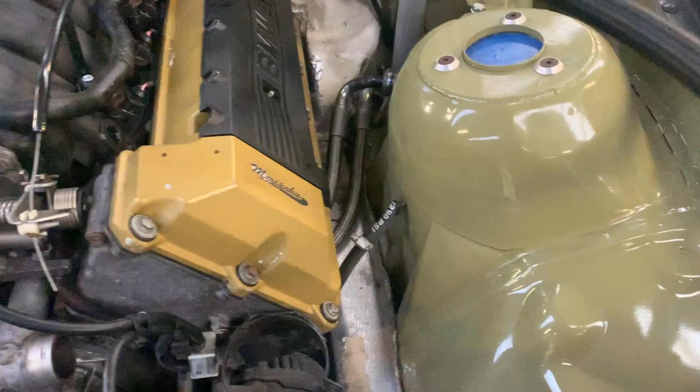We'll probably make a new one for that and go in that direction. And same over here, we're going to be going from here. We'll probably make some kind of fill point over here. And where we're going to be ending up with those lines is right over here, which is where I've cut a couple of holes. Right here, we've pulled the oil filter canister.

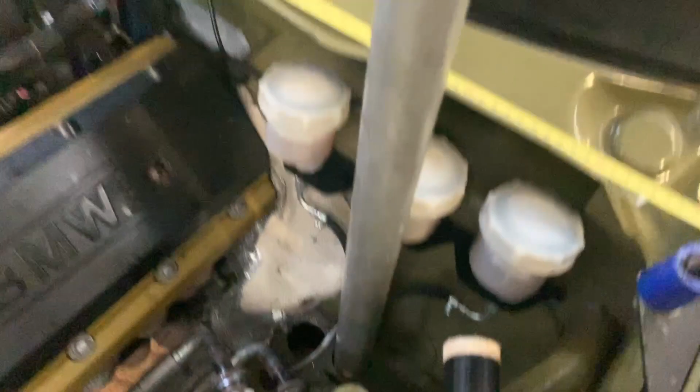I've just stuck this tube in here. We've drilled through over here, and we're going to be ending up under the car right over there, and you don't have to worry about the wheel because the wheel is never going to be touching it. Over there we made some space, but we're going to be bracing that, of course, right over there.

Like there, under here is where we'll make a brace. We'll box this whole section up, of course, but there's going to be a little brace under there just to be sure if you hit something or whatever, just to add a little structure.

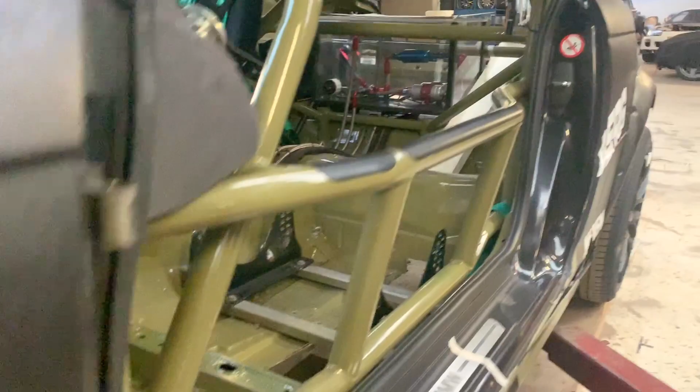On the inside, we had to have the scary job of cutting. As you can see, it's not very easy because it has the FIA style seat mounts. And over here, that's basically where our tube is going to be coming out, right over there.

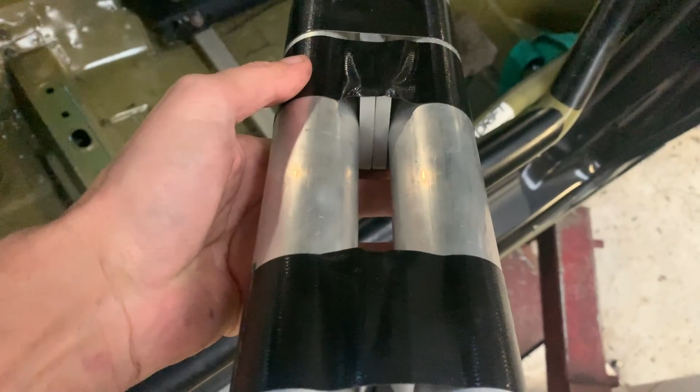So what I always do with these types of deals is get two tubes and space them the way we want to. We just have these little blocks that we use to space everything out for that. And that's what we're going to be working with.

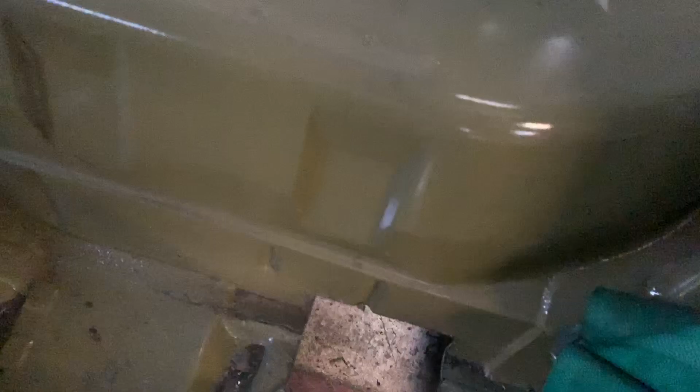So these things basically need to go under the car. As you can see, that's basically where they're going to be going. We need to make a solution for the seat frame because it's going to hit over there. Good thing that the driver of this car is not very tall, so we can go up a little bit with that.

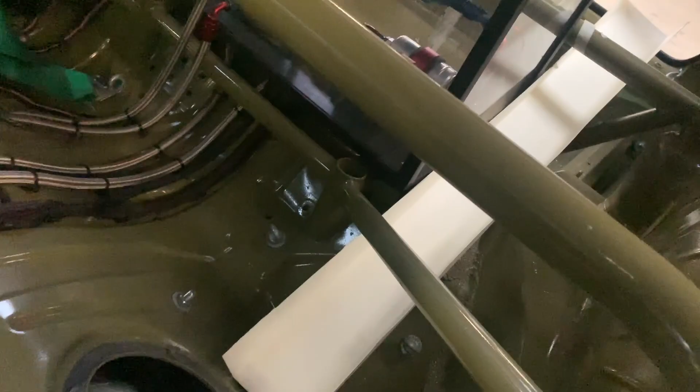And we're going to be coming out of the floor somewhere right over there. And I've made a little cardboard box over there to mock up how we're going to go to the rear. Over here, there's already a little bit of space from the factory, so to speak, in this section. That's where one could basically go over here already all the way to the front, but the second one's never going to fit.

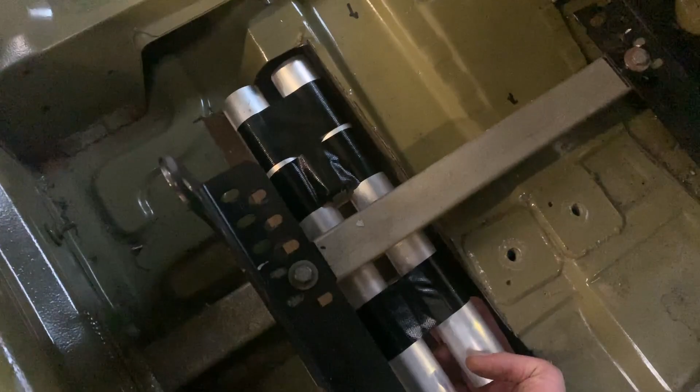So we're going to be boxing this section. We're going to keep the seat frame in there, of course, and box that all the way to the front so these tubes can run through the floor. It's always a little bit of a scary sight.

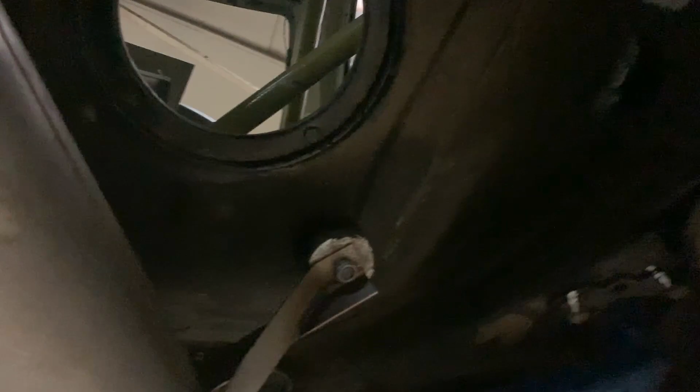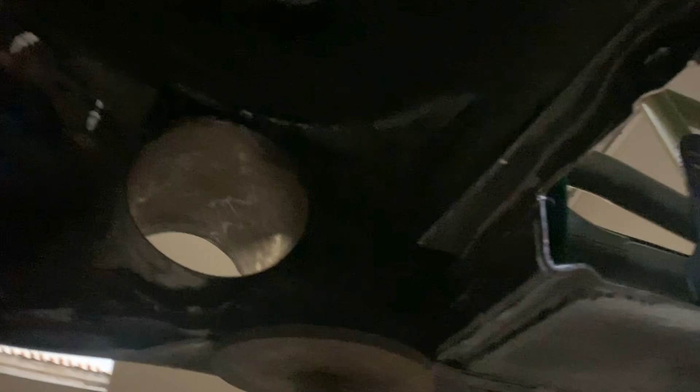Here we've cut out on the floor, and that's where the tubing is going to be coming out of. And that's where you can see the exhaust is over there, so we're probably going to be looking to get tubing right over there, go in there and mount the electrical water pump up there. Yes, it's going to be a nice cavity, so it's not going to be the lowest point of the car, and we need to be extending right over here.

We're probably going to be bracing from here to there to get some strength, and that's where the tubing enters the car. So yeah, not the easiest solution, but it's basically the only option that we have.

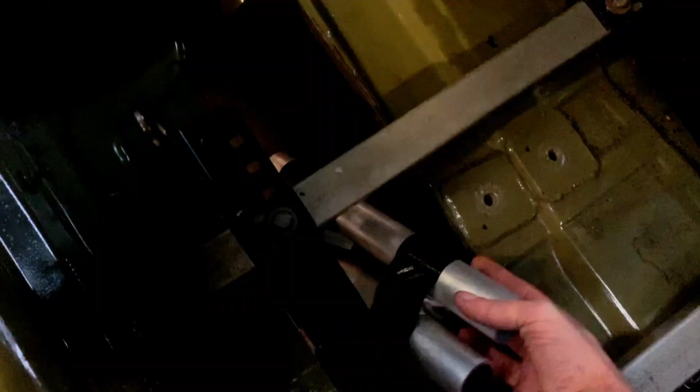There's a lot of people that run stuff through the interior of cars. I'm not really crazy about that. And people say, yeah, but you can box it up.

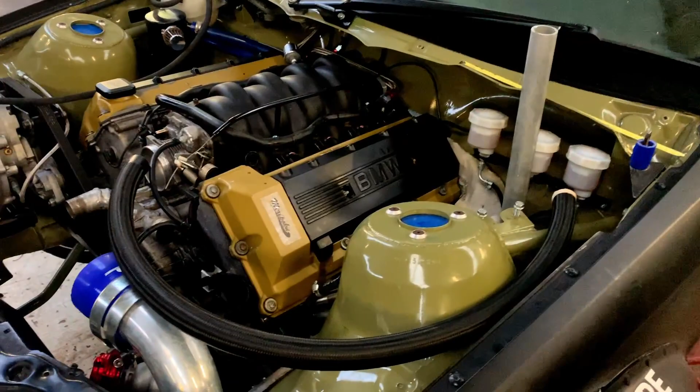It's the same as a floor loop in between, but the difference is that it won't lose any heat in the process. And if you run them under the floor, it will basically operate as a cooler as well, so the tubes will be able to get rid of their heat and it will make a huge difference.

It's a radiator that came with the car that we're going to be using. It's an HGK radiator, it's a C&R, but HGK modified it. I think over here they ran an oil cooler at one point, it's blocked off right now. We're not going to be using that, but this is a client-provided part.

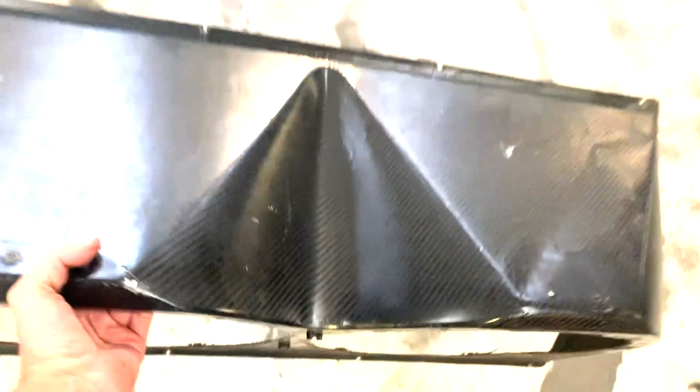And it also has this really nice Kevlar carbon fiber shroud that's going to go on there, and we're going to be using all that and vent out of the trunk. It's kind of a nice piece, really cool.

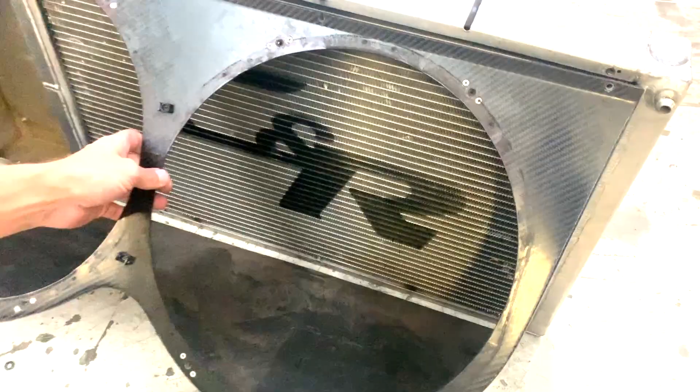And here we need to block up the trunk. Guys that have seen the way I do that on the E36, same way. So we make this whole template, which is going to go basically over there, and we're going to be boxing off that whole section. Can't do it right now because that little cardboard section's over there, and we're going to be using our famous piece that I always use on the E36 to close this off and make like a shorter parcel shelf situation.

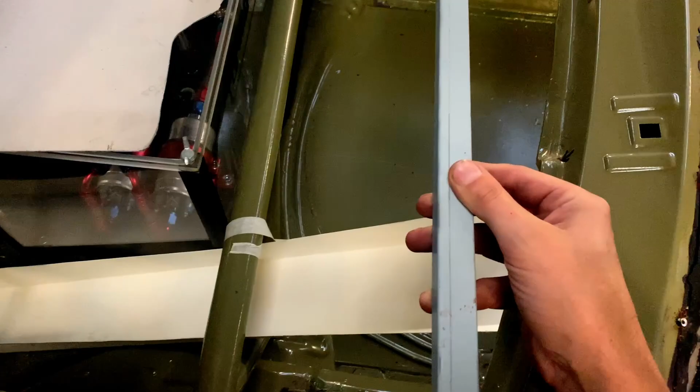As you can see, that's basically where the firewall is going to be. We're going to be coming through with that piece over there. So a lot of fabrication going on, of course, with these deals.

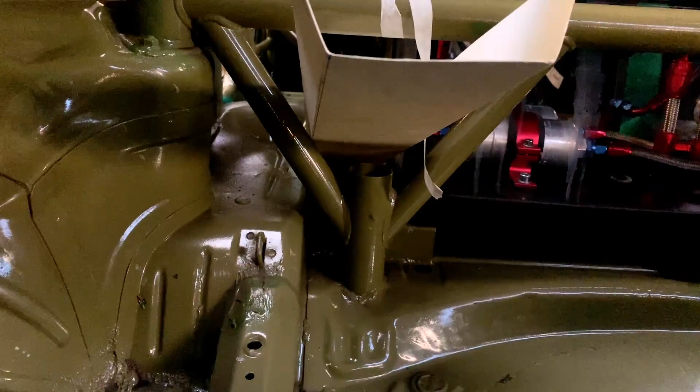It's very, very difficult here because you can see that I need to work within the confines of the roll cage reinforcement for the rear axle, and right over there is another tube. And there's this huge box for the fuel system, so I need to work around all of that.

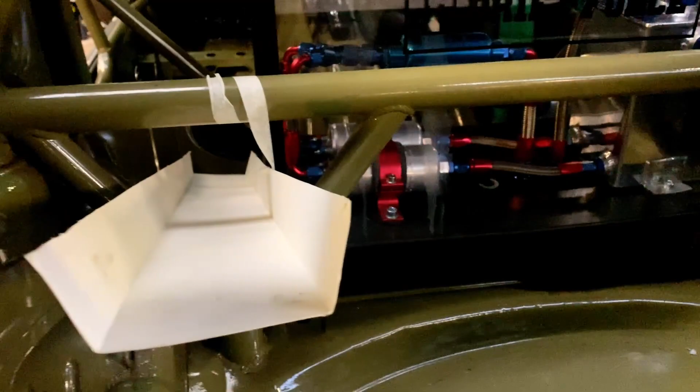There's basically only one window of opportunity to come through here, and the exhaust is right over there, so it's very, very tight. Like I said, one of the most difficult cars I've ever done this conversion on.

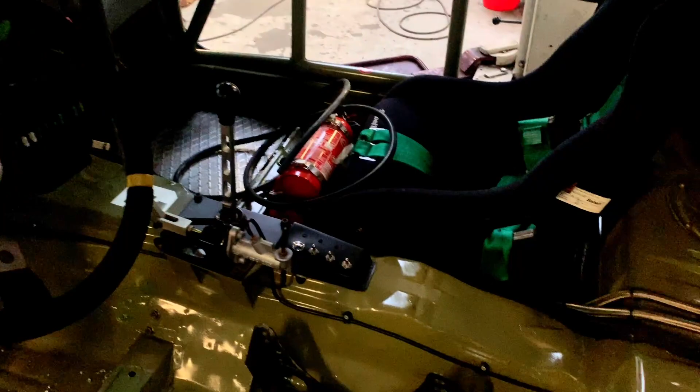Yeah, so that's basically the only option. You might say, hey, let's route it on the passenger side, but the original style tank is still under here, which completely obscures the floor, so there's no way I can pass under that.

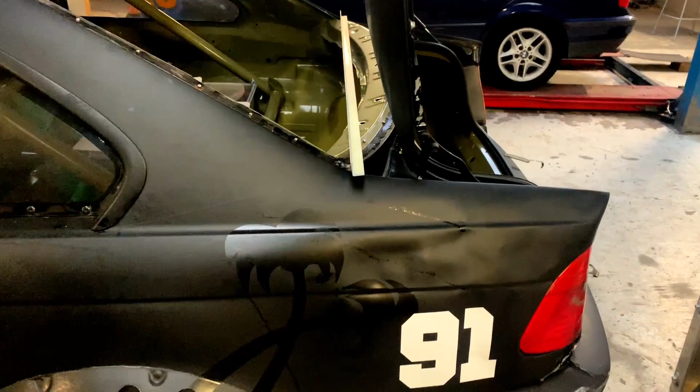And with these types of deals, you need to go from the floor and go over the rear axle somewhere, because the radiator is going to be behind the rear axle. Like on my sedan car, obviously the radiator sits in front of the axle, which is a lot easier with all the tubing.

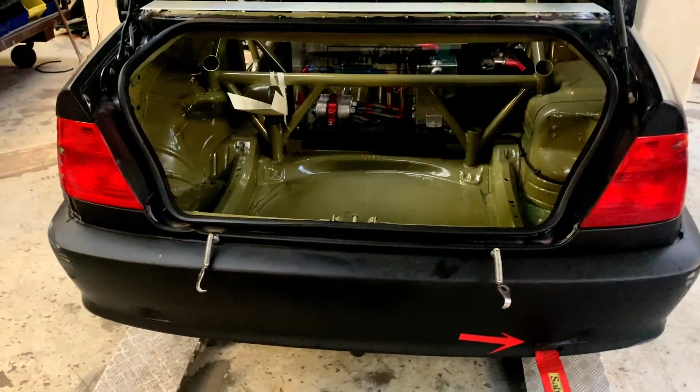Because with any car, it doesn't matter if it's an E46 or an S-chassis or E90 or whatever, it's very difficult to pass through the rear axle with all these lines, especially if it's a V8, because you're going to have a little more elaborate exhaust than a turbo car, which may have just one exhaust. So that's just a little bit more difficult to do.

It's always a little bit of a puzzle. And like I said, you're really going to have a lot of trouble moving those two coolant lines across the rear axle. So before the rear axle starts, before this point, you really want to be inside the cabin with the lines. Otherwise, there's no way you're going to be making that work.

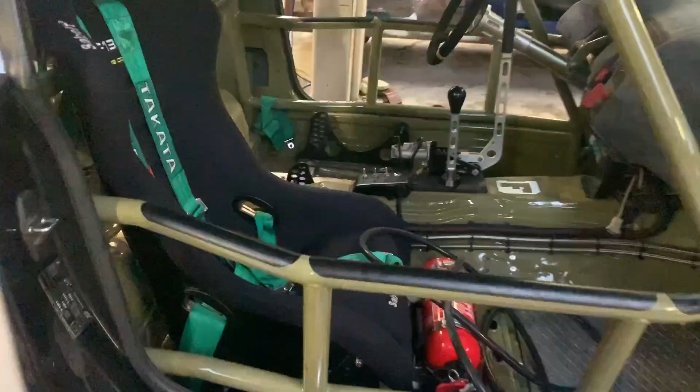Yeah, there's another little view. It just sucks that the floors aren't really straight on these cars. There's all kinds of little things in there. We have to basically make it straight, which is not the easiest job to cut.

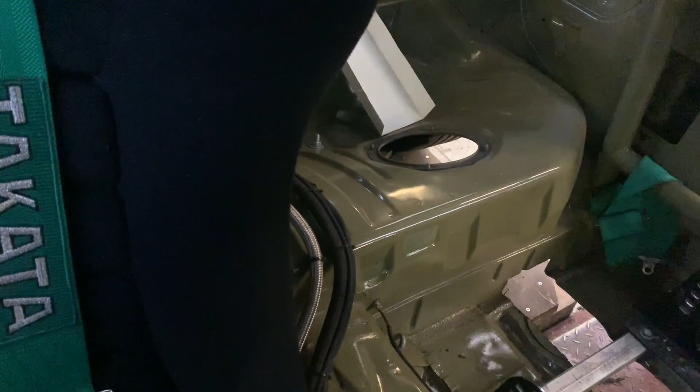And there, you can see it's really tempting to use that manhole over there. On the other hand, it's also going to be a little bit difficult because it's a little round piece, and I kind of want it to be detachable because I want to put the electrical water pump in there, so we could access the electrical water pump through that gate.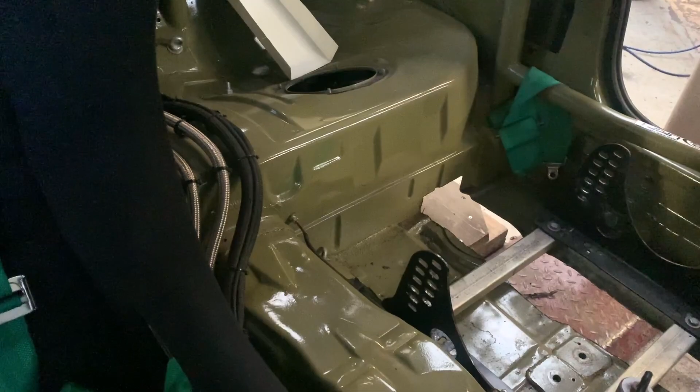You can see it doesn't completely line up, so there's going to be a little S-bend that has to be made in the lines. But like I said, the electrical water pump is going to be underneath that manhole, so we're going to do a little bit of fab work over there just to connect the return and the feed line for the radiator to the electrical pump. So the electrical pump is going to be in the return, and the feed line is obviously going to go to the radiator.

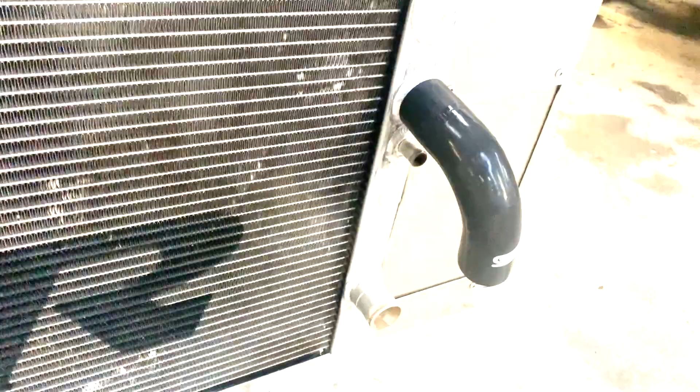One really nice thing is that this radiator is dual pass, so it forces the fluid to go through the radiator twice, which is nice because it means the lines are both on the same side. Otherwise you'd have to come across from here to here. On most cars there's one pass, so the hot side is over here and the cold side is over there. They've done a lot of changing on this radiator, but HGK runs these in a lot of cars, so we're just going to roll with that.

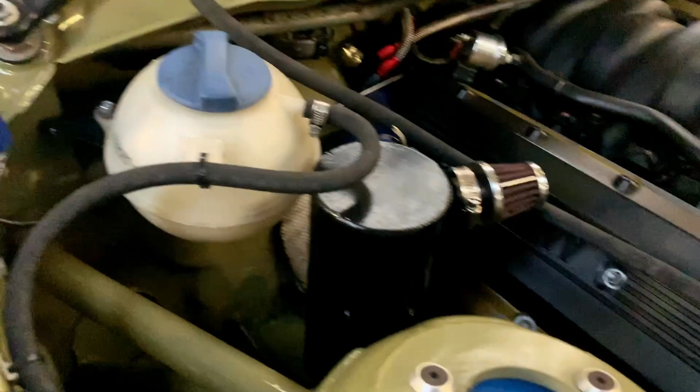There's just going to be a little vent port over here, and this is where the radiator gets filled. We're running another fill canister over there, a cheap solution for the fill canister. These VW ones, I'm not crazy about their looks, but it's nice that they're simple. Just one line goes under there, and this fills the car in the back. It's also really nice if you have a rear mount radiator to have a point where you can fill the motor. This fills the motor from that side, and here's the line that came from the radiator to vent that.

We're still going to keep this thing here because I want to have a bit more expansion over there, since these motors are aluminum, so they emit a lot of heat. It's nice if they still have some expansion going on.

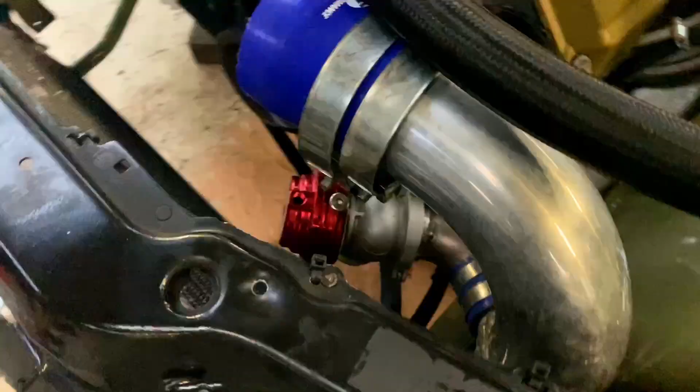We are also clocking this thing. It's like a turbo wastegate, and it's controlled by this solenoid. There's also a standard dump valve, which is controlled on vacuum, so if you let go of the throttle, this thing opens up and dumps all the boost out. Of course, you don't want to run a huge amount of PSI into that motor, since I'm pretty sure it's just a stock motor, so we're going to use this solenoid.

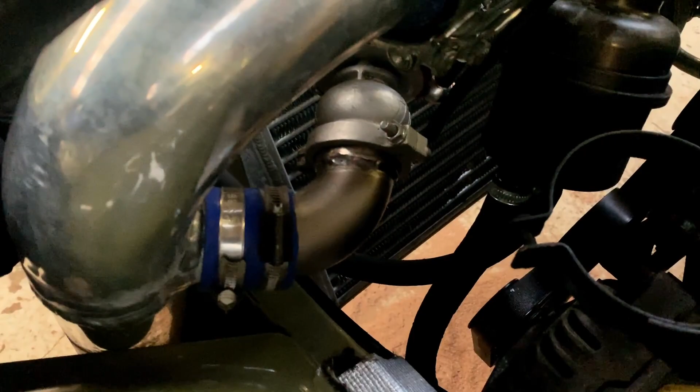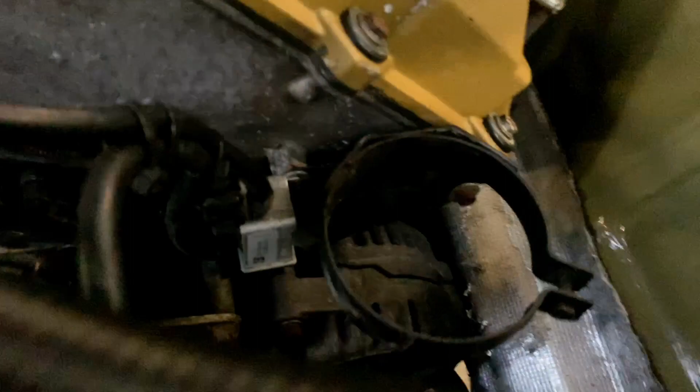We need to relocate it over here. As you can see, the trajectory of the hot side is 100% in the way, so we need to relocate this canister, relocate where that solenoid sits, and move these hoses out there. It's a kind of big hose, not super easy, so I'm thinking of making one a little shorter and running it on this level, and keeping the other one a bit bigger and running it on that level.

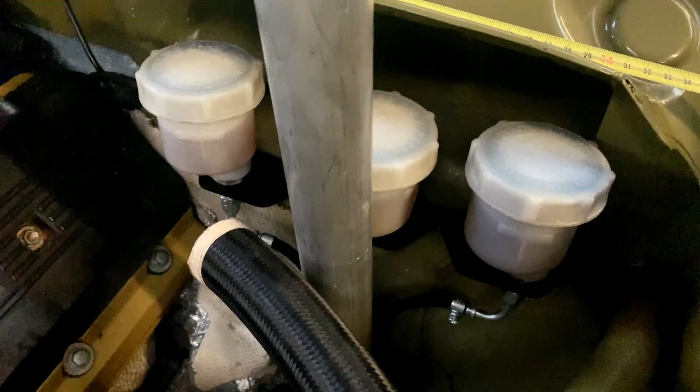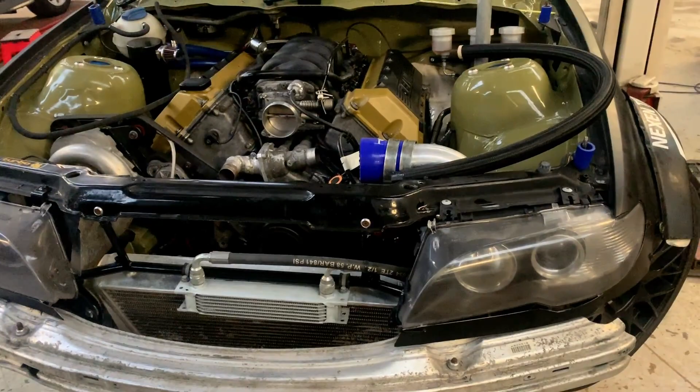Obviously you're always compromising something, so it won't be this close, it'll be a little lower. But there's just no way, if you have a V8 car with a rear mount radiator, it's almost impossible to keep it super clean. You're always going to sacrifice the accessibility of components, it's just the way it is, there's no way around that. We've touched on that already when I first spoke of this car. Super cool, but the packaging is very, very, very difficult.

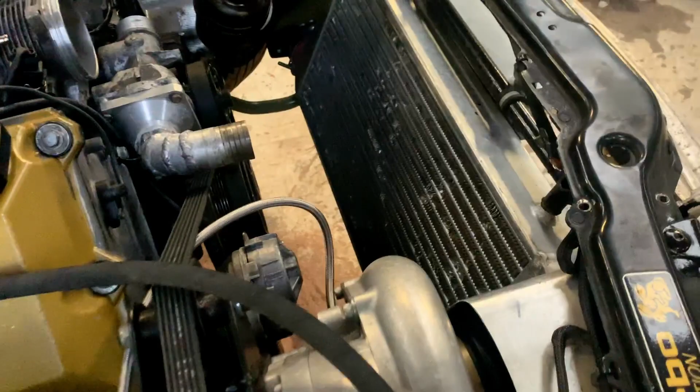It's kind of nice that the supercharger is pretty compact for the amount of power it can give, and I'm really happy how much this is freed up. If it was my car, I would probably move the intercooler back a little further, but let's first finish all this stuff up and see what kind of mapping we can get out of the car.

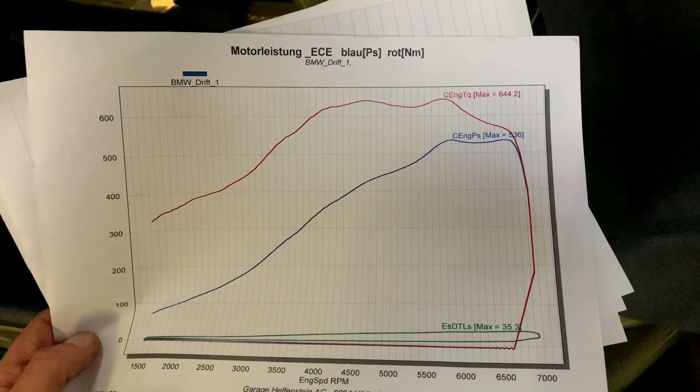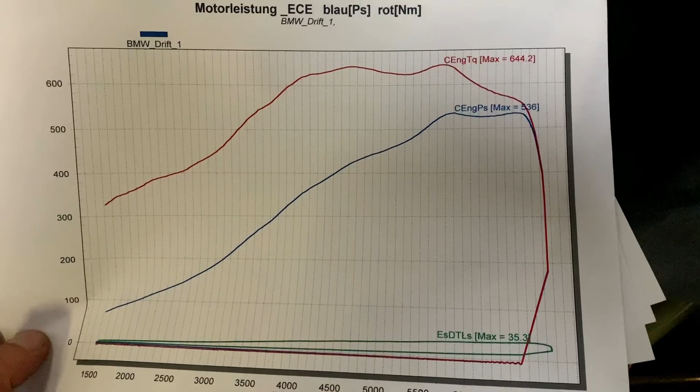It's not fantastically powerful, to be honest, because these things usually make a huge amount of torque. I don't think I've ever seen any M60 Turbo that made less than 700 Newton meters, and this one is on 644. It should be a bit more in my book, so it's 536 horsepower, 644 pound-feet - or Newton meter, sorry, I wish it was pound-feet. This is on ethanol, so you can run way more ignition advancement on ethanol, a bit more boost before it'll detonate. We'll see what's going to happen, and how much power we can get from it on pump fuel.

The pump fuel we have in this country is pretty good, so we'll usually get pretty good numbers from that. And I think this curve can improve a lot. So keep this in mind, what this curve is like, and when we have the whole car done.

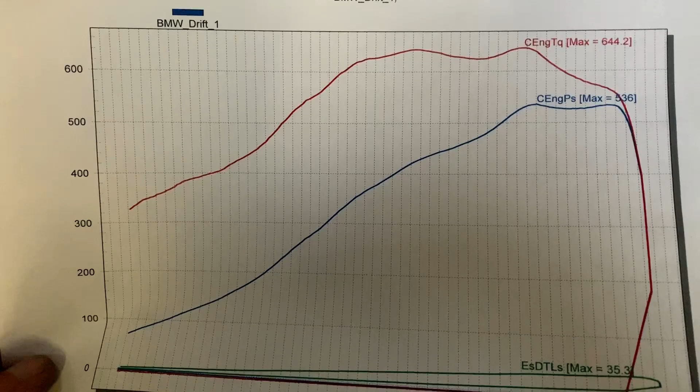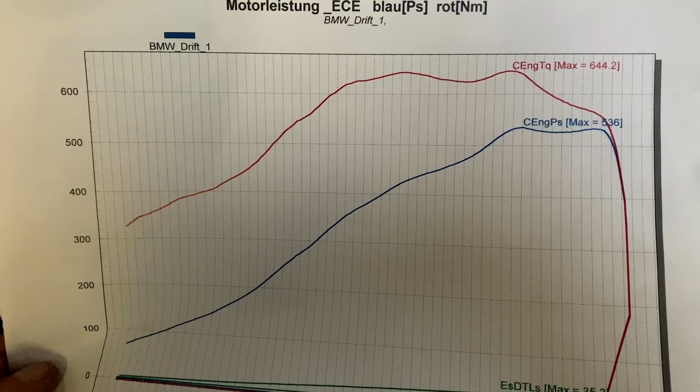It could also mean that this car is a little heat soaked, despite that it's on ethanol, because there's an oil cooler and no space between the radiator and the intercooler. So that could definitely mean there's a lot of heat on the intake happening. And despite it running on ethanol, that could mean you're losing a little bit of performance over there.

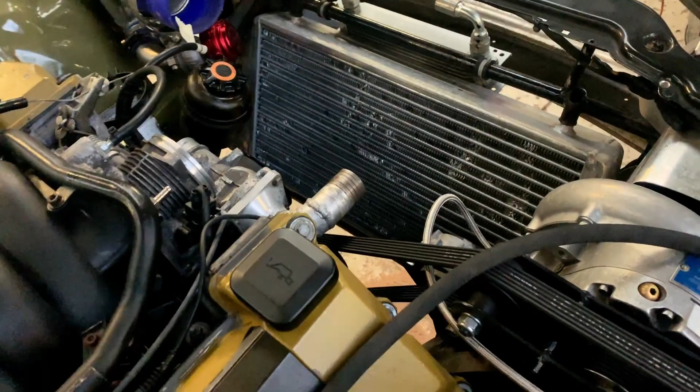So let's hope that it's going to be a little bit better. Obviously, we're going to be venting the hood or running without the hood. It's super important that the hot air can also go out. It's pretty good that it's tilted. So we'll just see what happens.

Let's first tackle this job. Like I said, it's one of the most difficult rear mount radiator deals I've ever done, because over there I also need to fit the oil filter canister, which we need to find a solution for, since it's very, very cramped and there's no way to get these lines off. Basically, to get these two lines off, the motor needs to come out, which is of course not ideal. I don't even think I can reach it when I just drop the subframe.

So there's another, like an 8 series canister that I'm trying to get, which has oil cooler provisions on it. So we'll probably have to remake this bracket a little bit.

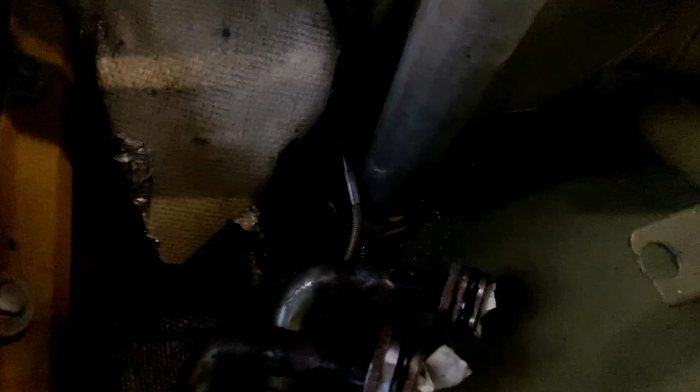And yeah, you can see how tight it is here with the brake line. Normally I think it's a little too tight, but the temperature isn't going to affect the braking at all. We're using really thick wall aluminum tubing for a couple reasons - one is heat insulation, the other is that it's way easier to weld and to bend.

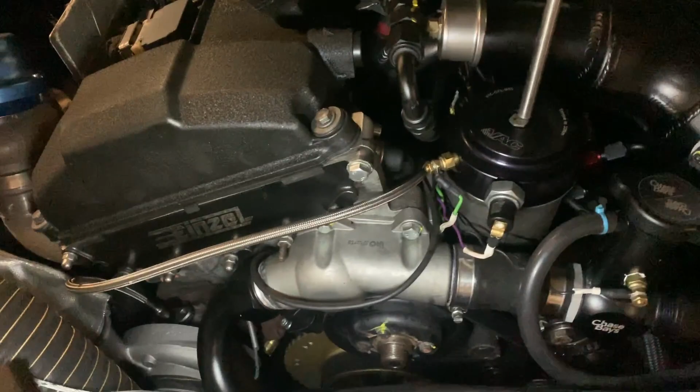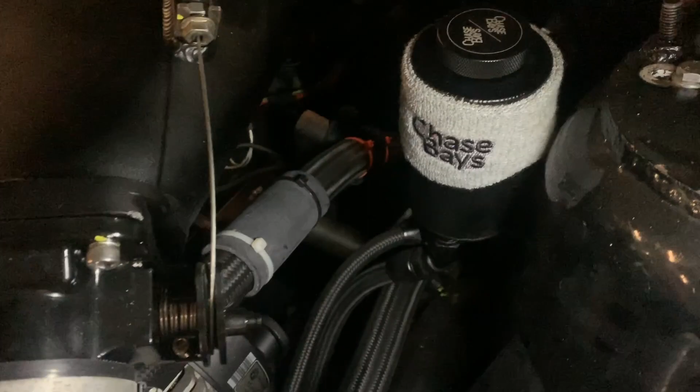So as you can see on my M50 Turbo car, this is where we went with the AN lines. There's another one, like a Chase Bays filler neck, and that's where the 90-degree will go, and then they're both dropping down over here. I made a little support for it right over there.

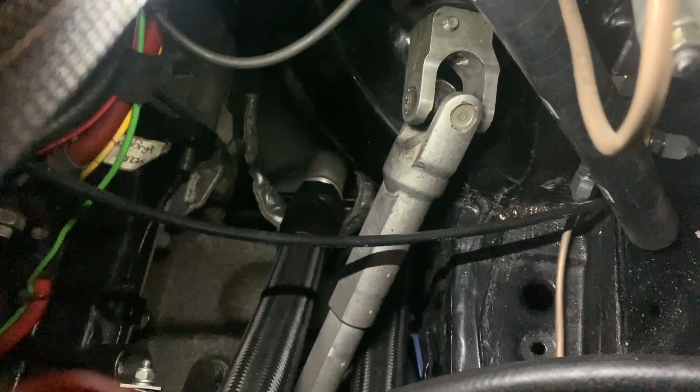We still have to powder coat all that stuff, and that's where it goes downstairs. Let me play around with the light a little bit so you guys can see. So that's where it connects to the tubes. There's another one underneath there, which is a little more difficult to see. So that's where they're going.

Little clamp over there, so yeah, that's where you can see both of those coolant lines coming up, and here's another overflow. Thank God we never needed that. It's really nice how cool this car stays on the dyno. Really happy with that. So that's the basic setup.

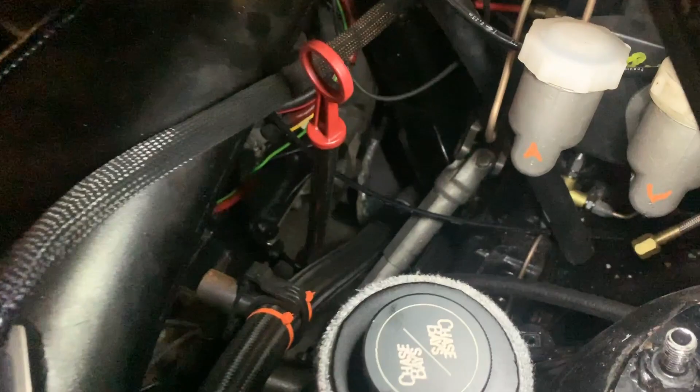So you always want to choose one side, like over here, because it's a turbo car. It has the exhaust coming out of the hood, so you don't really have to worry about running them into the transmission tunnel. And of course, it's really funny how much room is taken up by that BMW V8 on the other car, that there's absolutely no way to run the tubing through there.

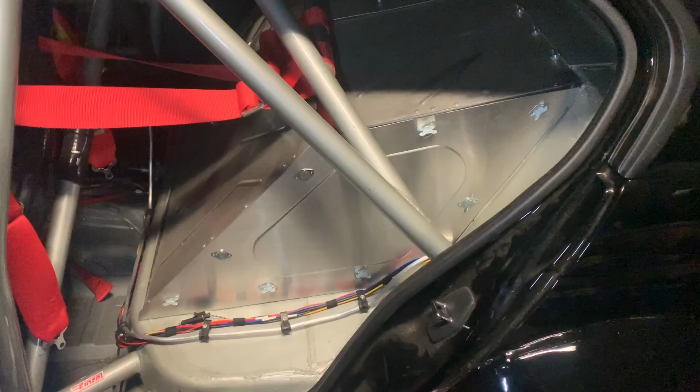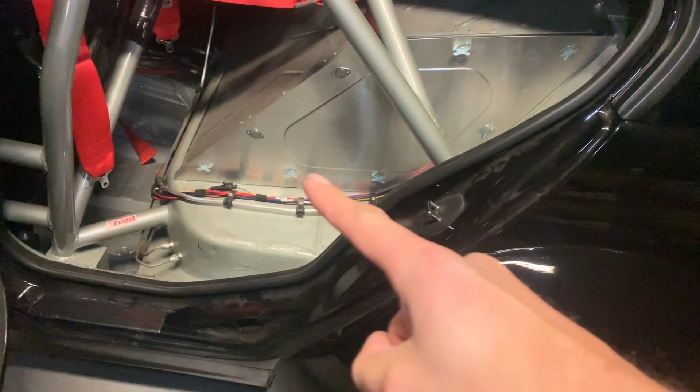And there on my sedan car, you can see over there we have the box where the radiator sits in. So the lines on that car are coming through the floor, basically right over there in that area. That's where they're coming through, and the radiator sits over here. So that's very, very easy packaging.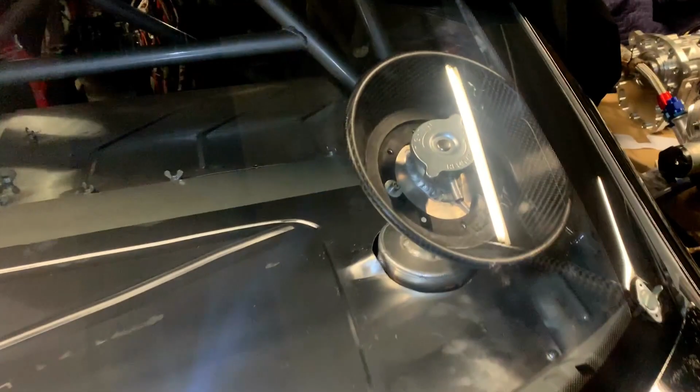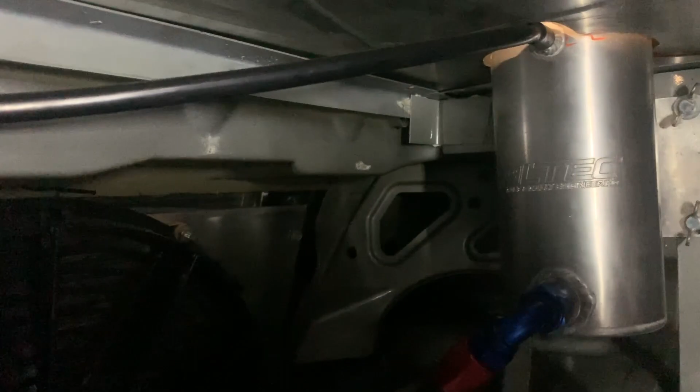And it simply vents out of the trunk over here - that's the overflow. And that's where the radiators are sitting, in like the overflow tank over there. I made that easily detachable, just in case you want to bleed it or something. Let's say if it didn't bleed very well, then we could pull it off.

This is the little mount for that, and over there you can see inside that box, that's where the line is coming through. And that's basically how that sits in my own car.

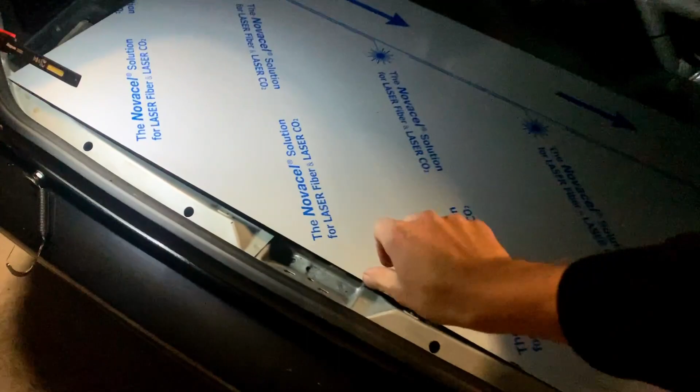And there's a stainless steel plate that we made that goes over the tank. We still need to attach that stuff - it's just there right now to check the fitment. So that's going to be really easy to run that through.

Run the air through there, and it basically connects nicely. Right over there, you can see it's going to be a really easy path for the air to come through the trunk. So that's how I would ideally do it.

Of course, it's a little bit difficult now to do it on the V8 car. It's very, very difficult to do rear mount radiators and those big changes on cars that have already been made. It just barely clears the bars over there.

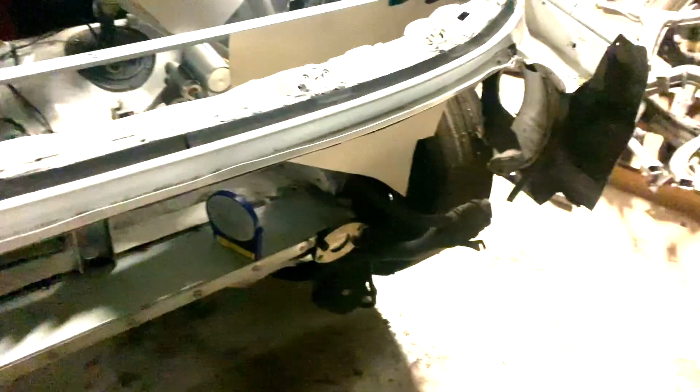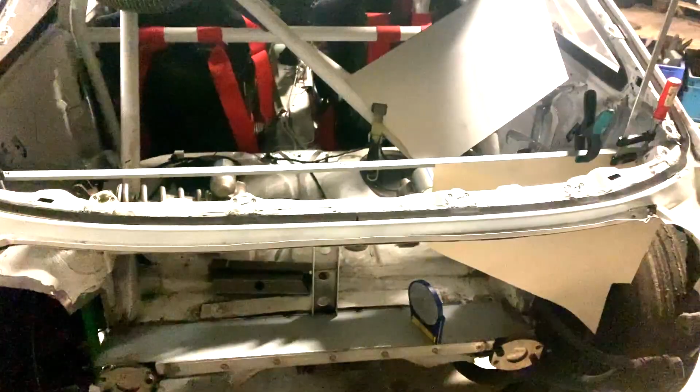So that's how it's done on my own car. I know you guys like all these little bonus things. So this is Cinderella, the car that I put in the wall, a pro car that I've had for many, many years. We basically pushed everything back. This frame where the window sits was sitting like 20 centimeters lower on that corner. So we've put that back in shape, using the exact same method you may have seen before in the video on how to measure and how to make a cutoff rear frame.

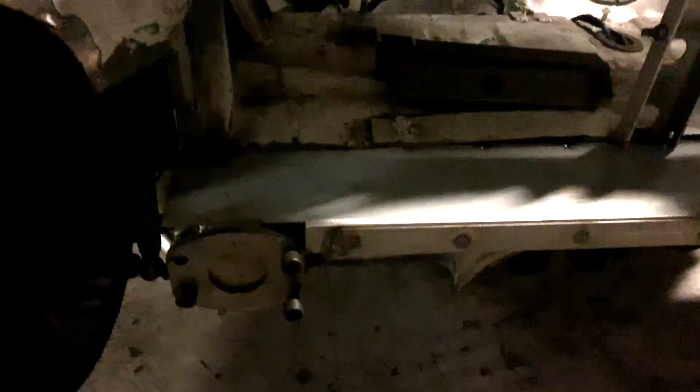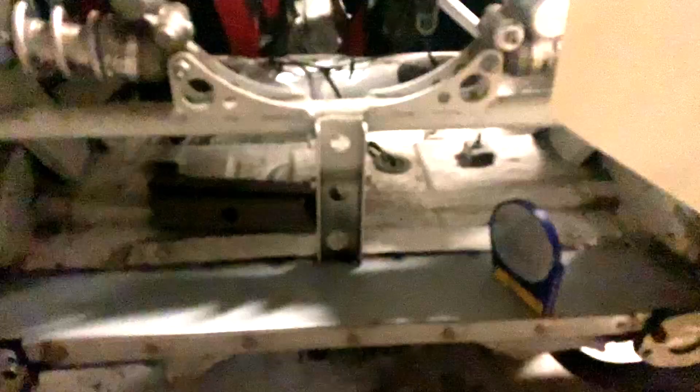This section is what we made. I made this a little bit higher because normally it sits here when you just cut off. Still need to get rid of this. That's basically if we ever want to run a quick change or something in that car. It's very important to make this really flat so you can manufacture those pieces.

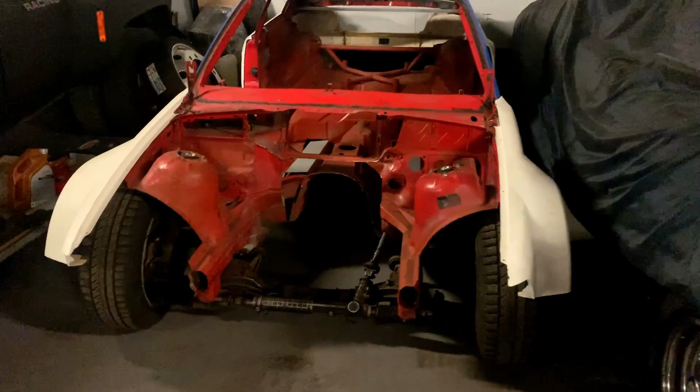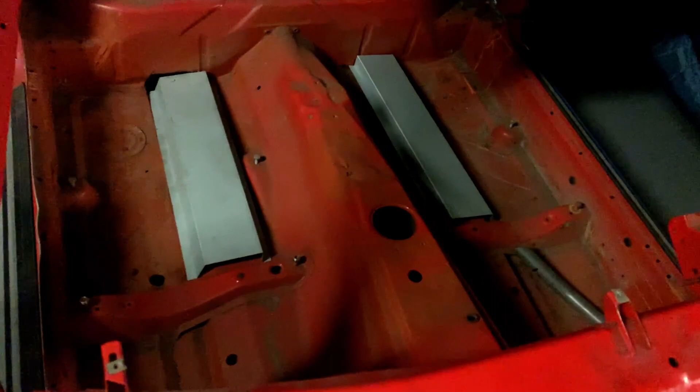And that's my other E36, the pro chassis that I'm building for myself. We're developing a lot of things over here. This doesn't sit right, so this goes, and it will fit really nicely. Just laying in there, hasn't been finalized yet, but we're making those two cavities so we can run the exhaust, because this car is going to be really, really low.

I know everybody says their cars are low, and here's another shot at how we fabricate those cut-off rear ends. I basically cut it out over there, and we're going to box up those sections and keep the center, like here you can see the line over there. So that's what we're going to keep open for the rear mount radiator.

This car is not going to get its air ducted from the rear window. We're going to use a completely different solution, which I hope I can show you guys soon. And this has been cut out, like that section you see over there. That's the maximum allowed cutout for Formula Drift and Drift Masters, so it's the exact same rules in that regard.

If you look at how low that subframe sits, that's really pretty low. I'm not sure if you guys can see in the photo, but the toe of my boot almost doesn't go under - it's really super low. So it's going to be a really low car with a really sick body kit.

The reason why it's so low is because that body kit is really high. It sounds kind of weird, but the cutouts for that body kit are very high, so that it will clear the wheels when the car sits really low. So it's going to be a really sick car.

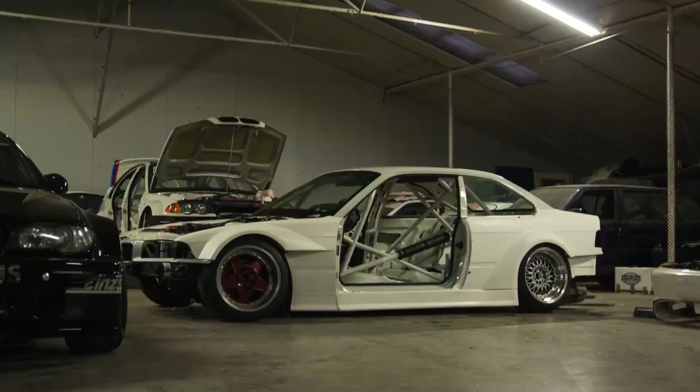And I had this body kit on a different chassis that I sold to my buddy Jeff, who's going to be building a car out of that. The reason for that is that we wanted to do all these kinds of things - cut out the transmission tunnel, put these two sections in there, and some more provisions for the rear mount radiator, and develop some parts for that.

It's not super easy to do that with an already painted and caged chassis like the old E36, so I sold that one to Jeff. I hope he's going to make something really cool out of that.

And this is going to be like my non-plus ultra, the nicest E36 that I'm basically able to build - this car, of course, with the Chevrolet V8 and with rear mount radiator. So stay tuned for that. It's obviously on the back burner because it's very busy in the shop. But yeah, it's going to be really cool. See you guys on the next video.